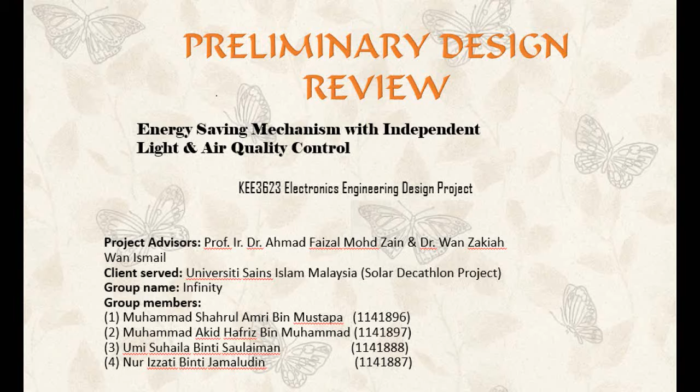Akid Hafriz bin Muhammad. I will explain to you about the features in Smart Solar House Power Management System.

In this house, we implemented 3 systems: limiting system, reminder system, and power saving mode.

For the power limiting system, the system ensures that the user does not exceed 5,000 watt of total power usage at one time. If the total power usage exceeds 5,000 watt, the appliance will not work.

Let me show you an example. If I switch on the first appliance, the total power usage is 1,500 watt. I switch on the second appliance, the power usage is now 3,500 watt, and for the third appliance, the total power usage is now 4,500 watt.

If I switch on the fourth appliance, the system will not work because the power usage just now is 4,500 watt, and if this appliance works, the total power usage will exceed 5,000. Therefore, to switch on the fourth appliance, we have to switch off any other appliance, which is optional for the user to choose. Let's say they switch off the second appliance, so the total power usage will drop and the fourth appliance will be allowed to work.

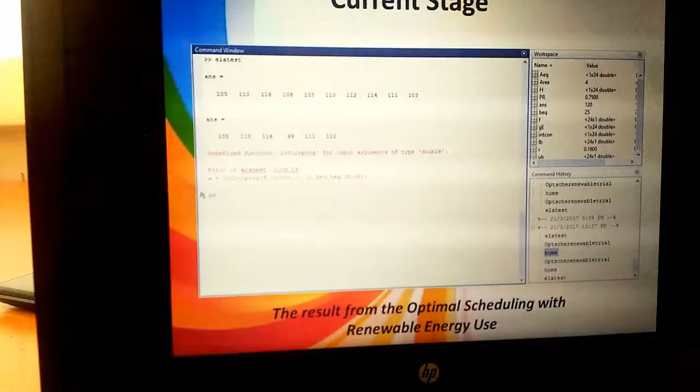As you can see from here, there is no difference between the two, with and without. So this is our issue now. For the suggested plan, we will try to modify and analyze the coding so that we will get the answer.

Actually, this is not the main system that we will use. This is just to compare with and without, to show the user the significance of the smart solar house. And this is the upgraded work we did for this week.

We have found all the brands of the appliances, and for future work, we will create a simple coding and interface it using Arduino, and the Arduino could control all the features in the house based on the power system that has been created.

Now I am going to present the comfort control mechanism, which is the air quality monitoring system. Currently we are building the software coding and doing the integration between software and hardware.

We have found an example of a schematic diagram to follow, and we have also purchased all the materials and components needed to design this project.

This is the proposed hardware methodology. We use the MQ135 sensor as the air quality sensor, Arduino Uno as the software, and LEDs, buzzer and fans as the output hardware. This is the main feature of MQ135.

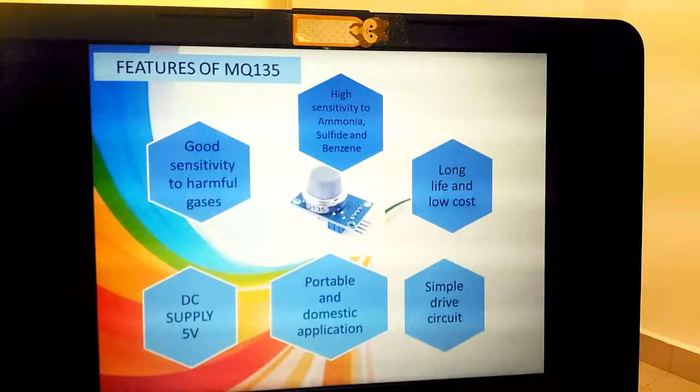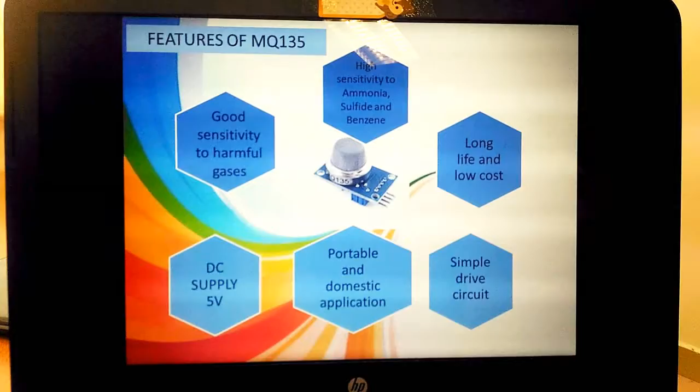As you can see here, this sensor is very sensitive to harmful gases such as ammonia, sulfide and benzene. The DC supply is only 5 volt, and it is portable and suitable for domestic applications. It also needs only a simple drive circuit, has a long life, and low cost.

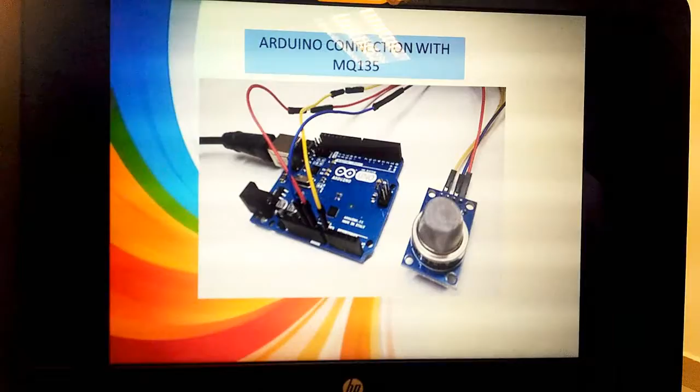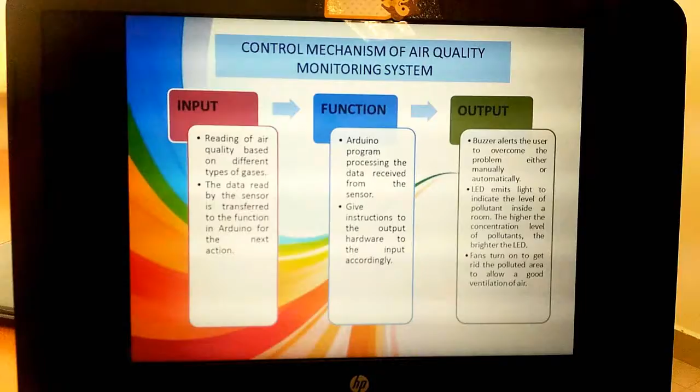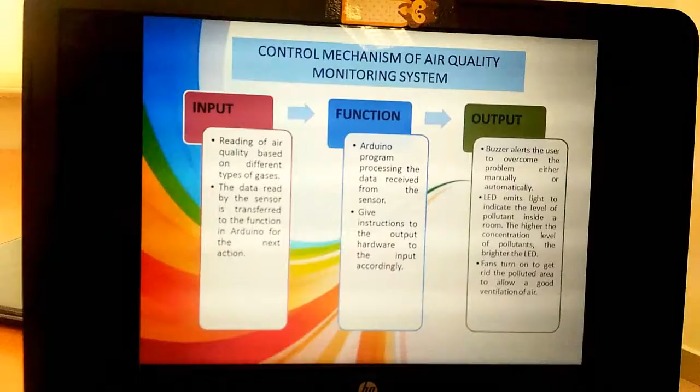The control mechanism of the air quality monitoring system: the input, which is the air quality, will be measured by the MQ135 based on different types of gases, and then the data will be sent to the Arduino software to be processed, and then the Arduino will execute instructions to the output hardware.

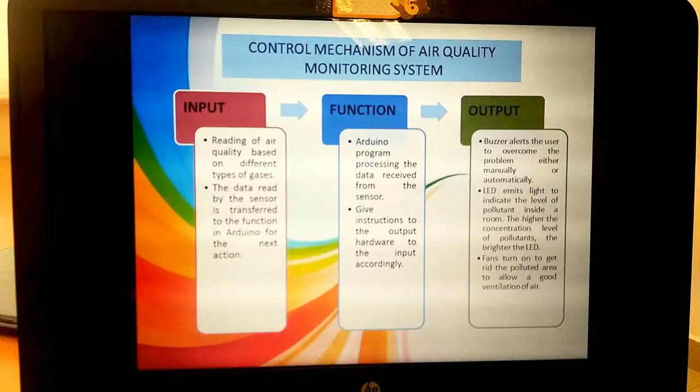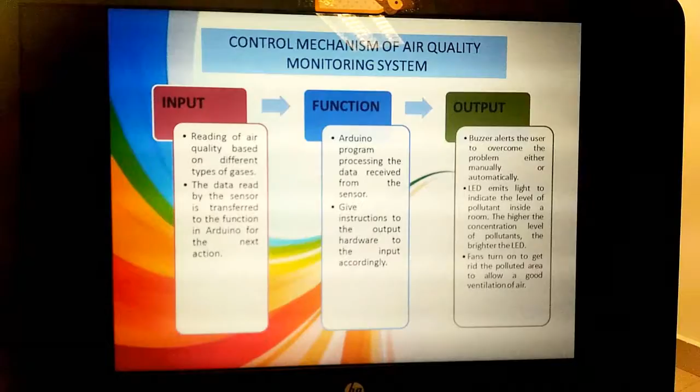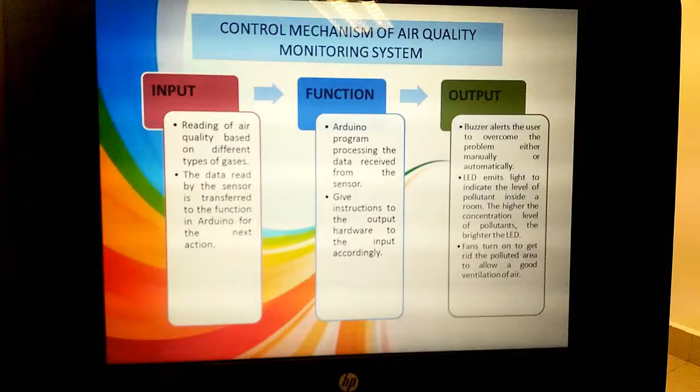The output hardware, first the buzzer, will emit a sound to alert the user, and the LED will emit a bright light to indicate the level of pollutant. The higher the concentration of pollutant, the brighter the LED will light, and then the fans will turn on to get rid of the polluted area, resulting in good ventilation of air.

Assalamualaikum warahmatullahi wabarakatuh. My name is Muhammad Shahrul Amri bin Mustapa. I will explain about comfort condition lighting.

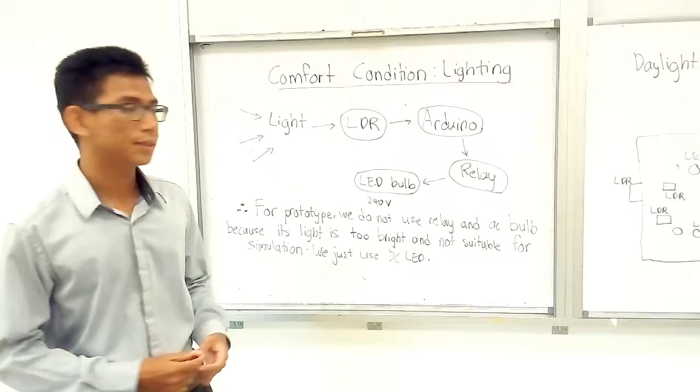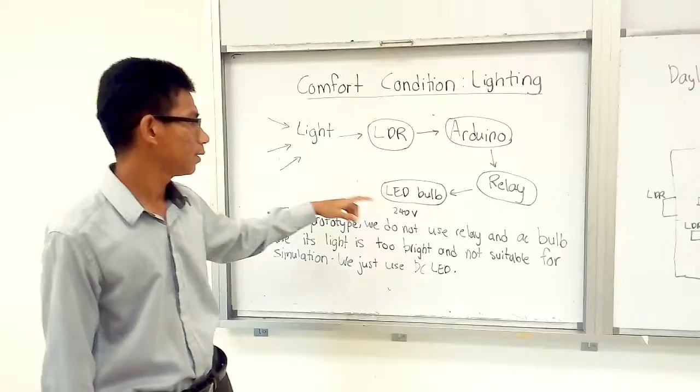This is the schematic diagram: surrounding light, then LDR, then Arduino, relay and LED bulb. This schematic diagram is for the AC LED bulb, which uses 240 volt, that's why we need to use a relay.

But for the prototype, we do not use the relay and LED bulb for AC because its light is too strong and not suitable for simulation. We just use DC LED.

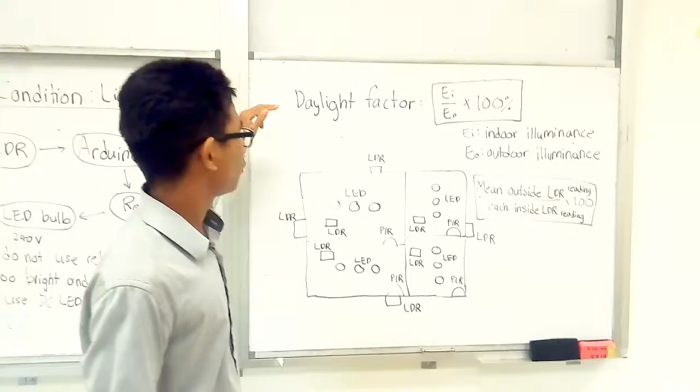For this, the daylight factor is EI over EO multiplied by 100, where EI is indoor illuminance and EO is outdoor illuminance.

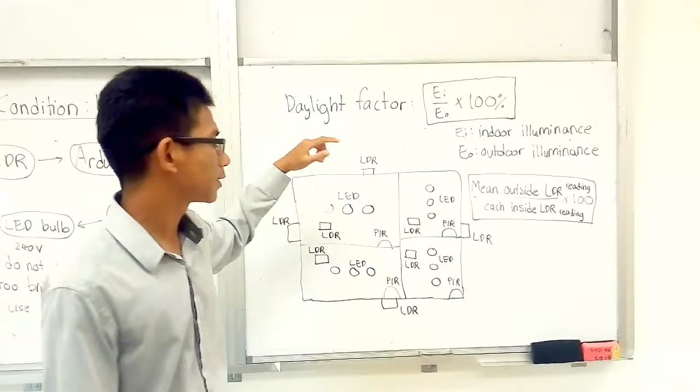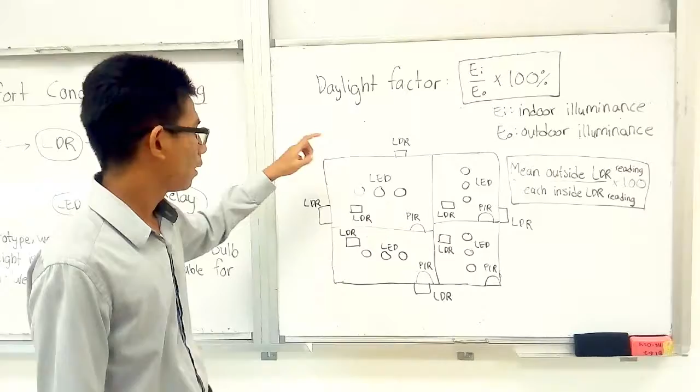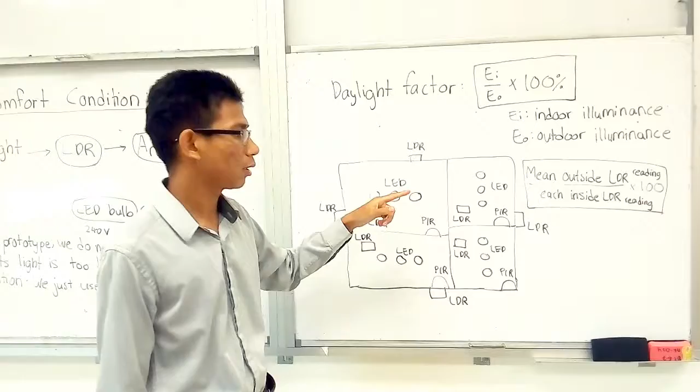For the house diagram, we use 3 LEDs for each room, and each room has an LDR and PIR motion sensor. The outside also has 4 LDR because we want to calculate the daylight factor. We take the mean outside LDR reading over each inside LDR reading, multiplied by 100 to get the daylight factor, and if the daylight factor is less than 4%, more LEDs will light up.

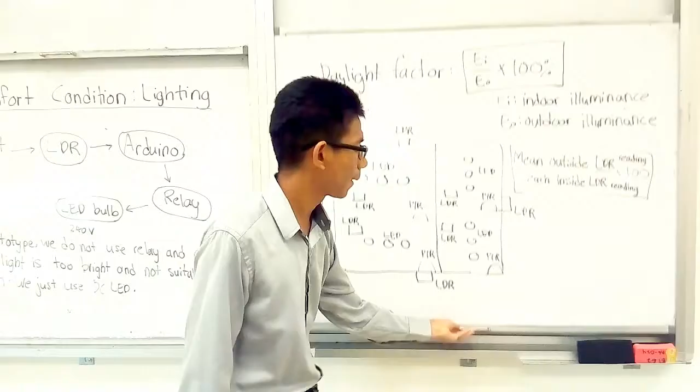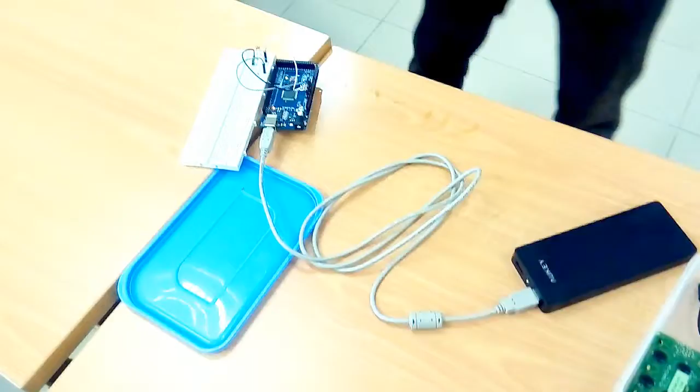This is the first prototype I have prepared. If light is bright, the LED is turned off. If light is quite dark, the LED is turned on.